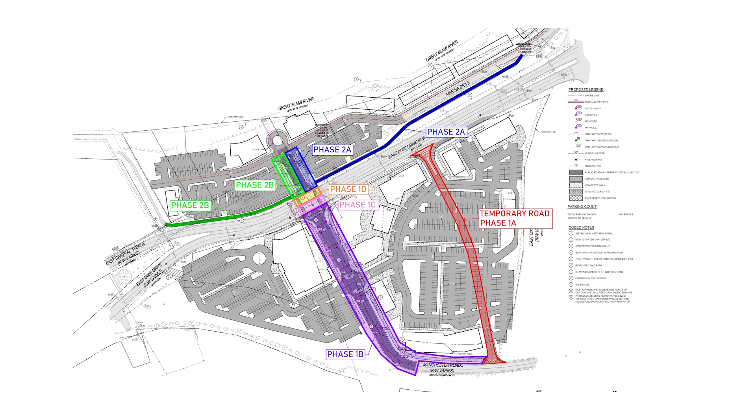So this was the concept plan that we put together that we've shown to council. Council has endorsed it, and we're in pursuit of that plan now. The first thing that has to happen is some infrastructure improvements. Those are in design now, and the bottom line is before we sell land, we need to get the roadways and infrastructure improvements put in place so that we can better control the character and quality of the development that follows. So just a couple of shots of that.

That work is underway now. From a planning standpoint, right now the subsurface engineering studies and traffic studies are being completed. Those will be completed this month, along with the overall preliminary design concept for all the public works project, which will also be completed this month. And then we go into phase 1.

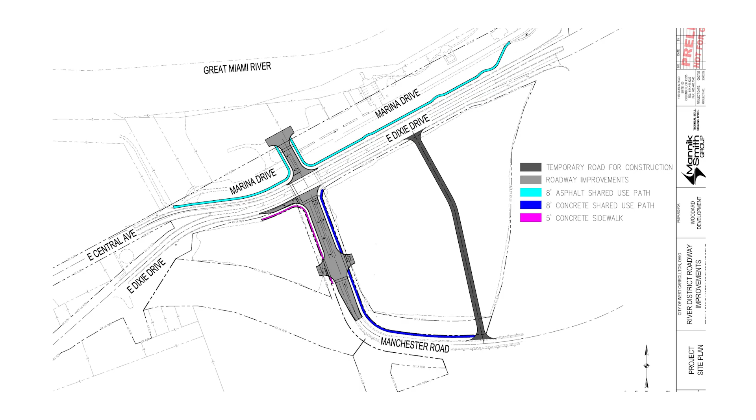So if I back up a slide, there's a temporary road to be constructed while we close the connection to, I believe that's Alex Bell that runs around the corner, to Manchester. That work will happen first, and then as we move toward the waterfront, that'll be a second phase. From a timing standpoint, that design work is going to proceed in October, should be wrapped up by March, and ready for competitive bidding in March of '24. The phase 2 timeline picks up after completion of phase 1, moving forward March through July, and should be ready for bidding in July of '24.

So the first things you're going to see happening on the site is the infrastructure improvements, which then allow us to move forward with vertical development. Now that doesn't mean nothing else is happening.

The Woodard Group has been working very hard to market the property nationwide, including going to the annual shopping center convention in Las Vegas to present the project to potential end users. There has been interest expressed. The job then becomes, once interest is expressed, we need to sort through that and make sure it's keeping with the character and quality of the types of uses we really want to see for the project. So we don't just take whoever shows up. We carefully evaluate who shows up and make a decision with the city as to whether or not this is accretive in value to the city, or whether it's just more of what you have today. So that's the process that goes on.

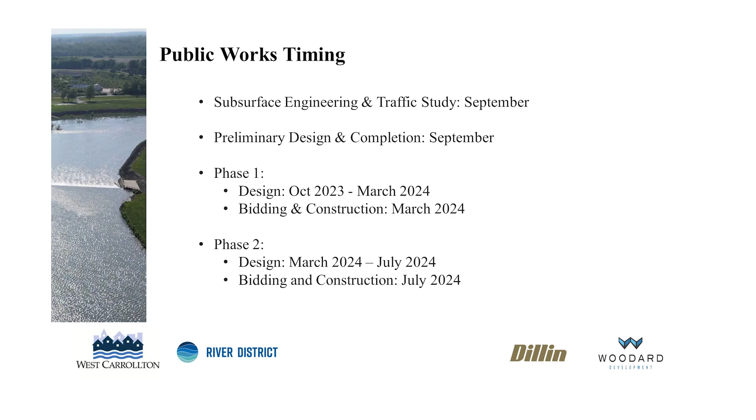I'll tell you that my crystal ball is fuzzier than it normally is because of some of the challenges that are being experienced in commercial real estate right now. Having said that, in all the master planning work that we do on all of our projects for various communities, we look for public space that can be energized with activity, because that becomes the heartbeat.

Those of you that may be familiar with the programs that our company used to organize for Austin Landing when we were managing that site, we did that with intent. The intent was to drive traffic to the site so that we could get better quality restaurants and better quality hotels.

We'd like to see the same thing happen here. So if we have to start at the interchange and all we have is the interchange, well, that's all then about local traffic. We don't have the destination orientation that we gain with the Whitewater development. So I'm putting lots of pressure on you folks down here. But that's what will work. Now you become a regional draw. Once you become a regional draw, you become a destination for the whole project. And so we can orient the project that way.

So when we come back to phasing, I'm not saying that no development can happen or should happen until the Whitewater Park is constructed. I'm not indicating that. But I am saying that things will accelerate from a development standpoint as you have success with the Whitewater Park. Is there any height limitations due to the airport across the way?

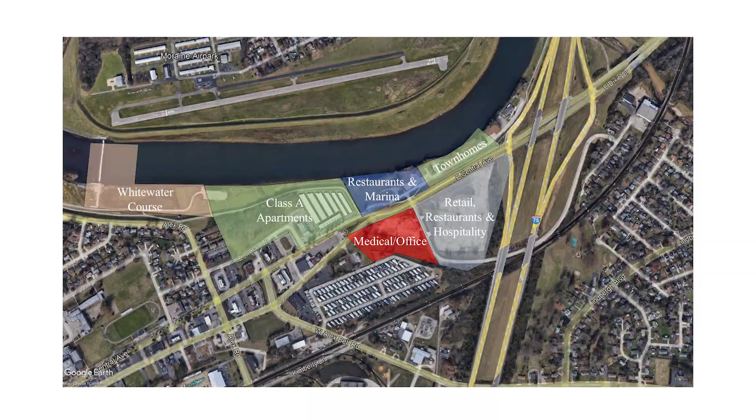I have done that on other projects, but honestly, I don't know the direct answer to that question on this site. There is, with FAA, rules both from a distance standpoint and a height standpoint, and those vary. So it's kind of a sliding scale.

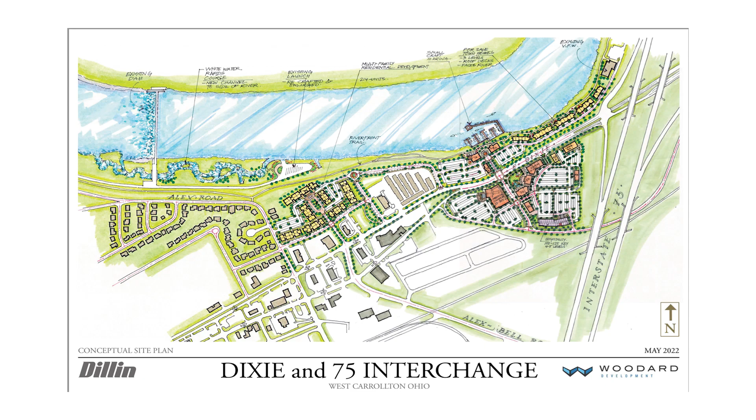What I can say is that if we're in the flight path of the FAA-controlled space, they will dictate the heights. Is there any kind of public use space in there with the Class A apartments in the Whitewater, like parks or other ways for citizens to be able to use the river?

Pavilions, the music, that kind of thing? The short answer is that the water park is a public park, so that will be open to the public. There will be no admission charge to enjoy the Whitewater Park. When we get into the presentation, we'll talk about the elements of the park. But the vision is that not only do you have to be a whitewater surfer or a kayaker, it's just going to be a place to come and recreate. I would envision that we will be doing some programming at that location, perhaps music, perhaps other types of events. But it is open to the public. It is yours as a citizen of the community.

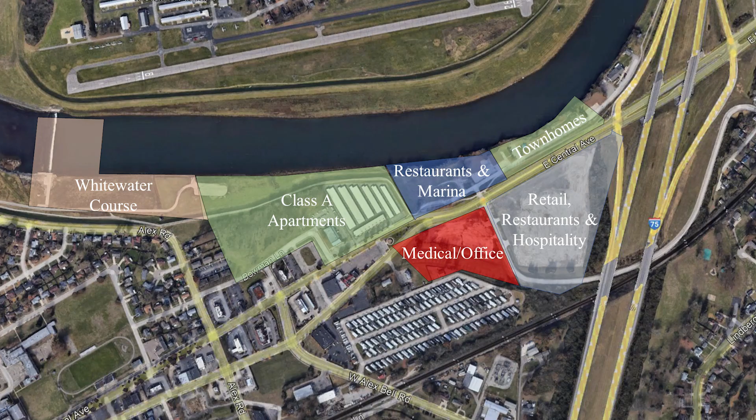Mike said that well, and I don't want to steal the thunder of what you're going to see here in a little bit. As a company and all the communities that we work with, we talk in terms of creating public space that can be energized with activity. Our goal at the end of the day is to not have whatever happens at the River District be our development. It's to be the community's development. We want you to think about it that way. Take ownership in using that public space, because it's yours. They're doing it for you.

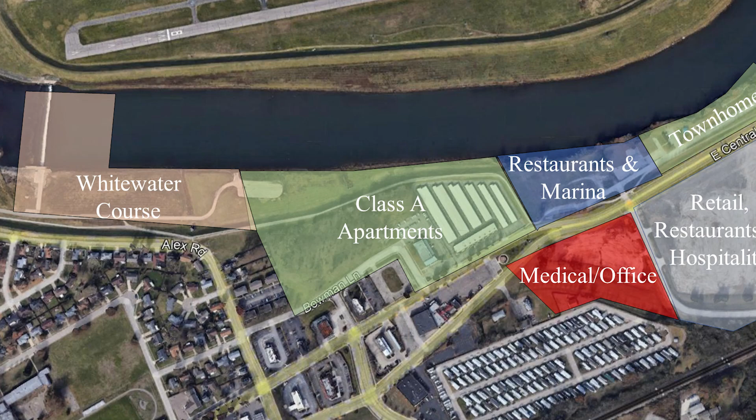In that area where you have the proposed apartments, does that not encompass the current storage units that are down on the river? It does. And that would mean that acquisition would need to be made for that property. That's correct. So what pieces of property on the river are currently owned? I don't know that I have a plan that I can show you that identifies that. But where we have the restaurants, the marina, the townhomes, the medical office, and the retail restaurants and hospitality, that is all city-owned property, and there are a couple of other parcels that the city controls as well. They did not control the storage and lock apartments, which is one of the reasons why we haven't spent too much time trying to analyze how to use that.

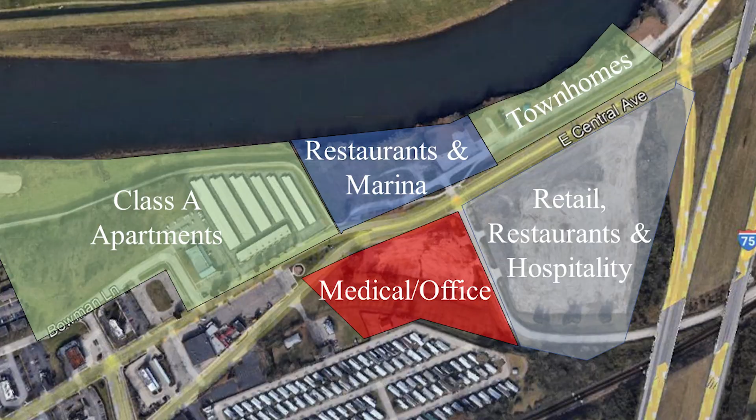That last question actually goes right into the question I was thinking. Thinking ahead, right? And I really appreciate you guys thinking ahead. That means a lot to us, especially thinking about being unique in the city, because there are so many different things off the exits that are the same exact thing. So being unique is a really important thing that I always believed in. Thank you guys for thinking ahead.

But with the thinking ahead, I don't know if it's in your vision, but do you guys have plans for future projects? I know, like you mentioned earlier, there are a few other parcels that the city has. I know that there were plans before, and I think if there are a few more parcels you guys acquire, that might be part of your plan. I didn't know if, let's say, the Shell gas station on Alex Road, if that is sold and the city buys it, or the trailer park home -- I don't know a better way of saying it -- if they ended up selling that and getting rid of it, do we have plans thinking ahead for something there? Does that make sense? Am I saying that right? Is that something that's in your future vision? If those things do get acquired, what can you do -- because I know you did it with the Class A apartments, you mentioned that already -- I didn't know if you're doing the same thing with the trailer park home and the property with the Shell gas station and whatever building that is.

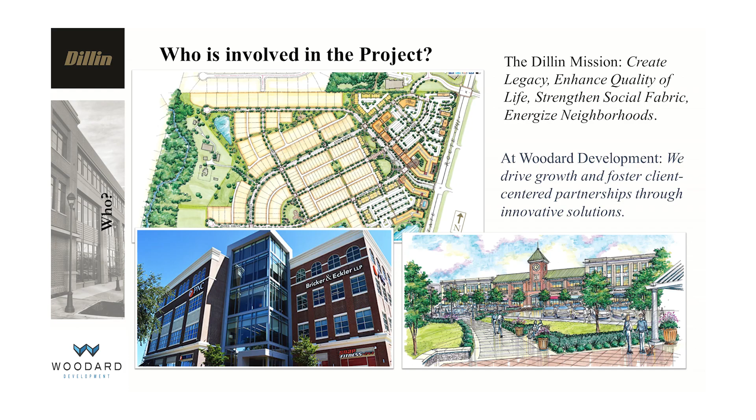And sir, your question will be addressed in the next presentation. That has been contemplated. We can talk some more about that as we go further.

As Larry pointed out, the Whitewater Park is going to be critical to the success of the overall development. And with something so important, you want the best at the table. We believe the firm we've hired, the Merrick / McLaughlin Whitewater Group, is the best in the business. There aren't many people who do the kinds of things they do, but the parks they've designed, and you'll see examples of that, are the best in the United States.

So we have the best at the table to create what, as Larry described, is going to be one of the primary assets in this community, one that we believe will not only serve people in this area, but will be a draw for people from as far as 2, 4, potentially 6 or 8 hours away wanting to use this asset and return, bringing other folks with them. So it's going to create vitality in itself, and I'm confident of that after what I've learned and the folks I've talked to over the past several days and beyond.

So with that, I'm going to bring up the team leader. Her name is Christy Weisleader. I love that name, Weisleader. That is a great name. And she's the team leader for the team that's here.

We have some very bright, capable people that Christy brought to work on the West Carrollton Whitewater Park. Christy Weisleader.

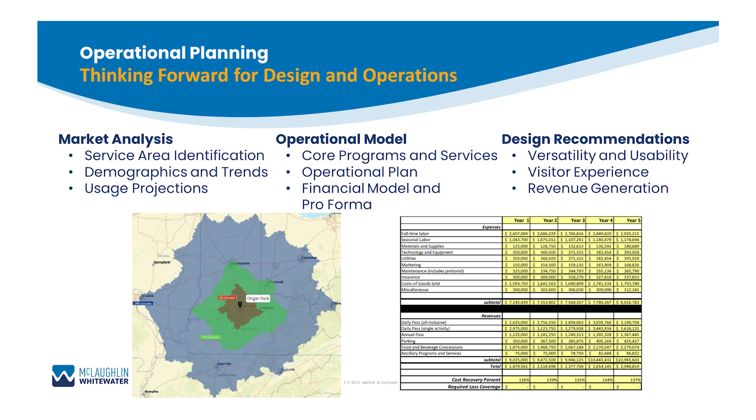So looking at what the different layers of that service market look like and the qualities and the recreational participation trends of people that live in those markets, so that we can really start to estimate with a level of accuracy what kind of usage projections and visitation patterns we would see at this facility. From there, we can put together a portfolio of core programs and services, a financial model, an operational model where you may have partners or concessionaires involved, and how that translates into a pro forma.

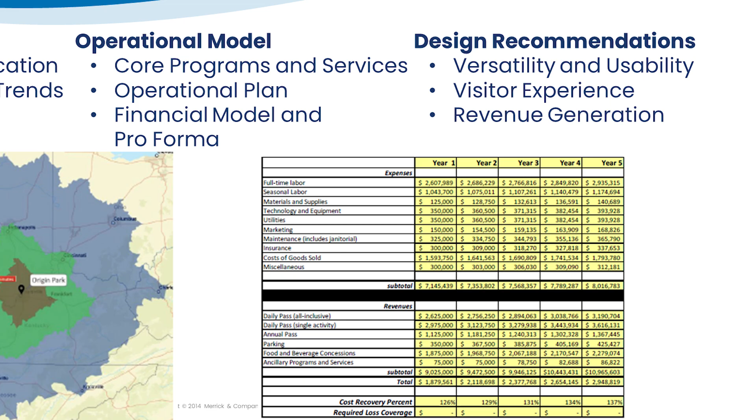And then, of course, providing support and guidance to the McLaughlin team as they're going through design. We're making sure that we're optimizing the user and the visitor experience, and that we're generating revenue so that the city can offset its operating costs in doing so.

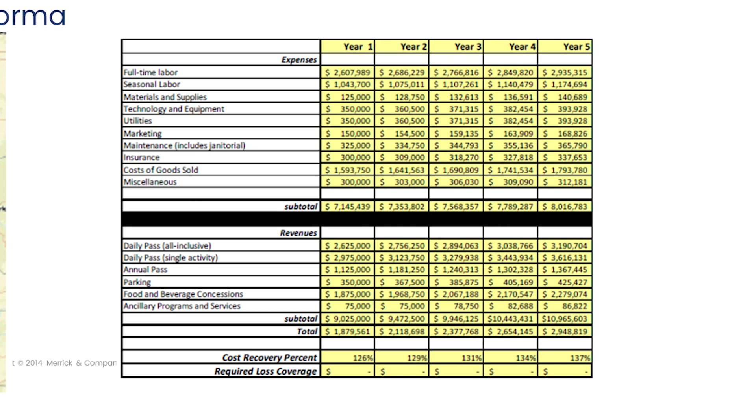So to the woman's question in the back about will this be a park for everybody else besides just whitewater paddlers, the answer to that is absolutely yes. The success of a facility like this cannot be hinged on just designing a park for whitewater kayaking enthusiasts. It's really about activating the space and energizing it for everyone.

So you'll hear a lot about some of the different design elements being considered at this point, whether it's whitewater kayakers or river surfers or families that come down and want to get in inner tubes and go down the side channel, or people that may just come down and gather, play at a playground or eat at a food truck and just hang out. That's what we really want to design a space for, so that it truly is an asset to the community, for everyone in the community.

So with that, I'm going to hand it back to Christy to kind of start walking us through the conceptual designs. I'm going to give you a little bit of project background and history really quick too, just so that you know what we've been up to for the past year.

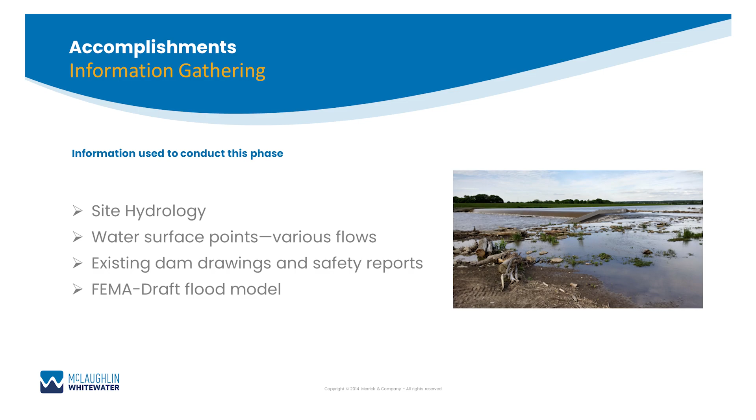So our accomplishments have been primarily data gathering. We've collected the site hydrology, looked at that, gathered water surface points at various flow elevations. We collected information from the Miami Conservancy District so that we have an understanding of the existing stuff that's there. And we also have the flood model and have been running that flood model to verify the existing conditions as well as looking at our upcoming proposed condition.

So we've collected 7 sets of water surface measurements over time through various flood events and collected critical elevations along the dam. We are currently obtaining the LiDAR data, that's the ground surface from the LiDAR fly-through over the site, as well as the bathymetry, the ground surface elevation underneath the water, so that we have that bottom-of-the-river survey information to incorporate into our modeling.

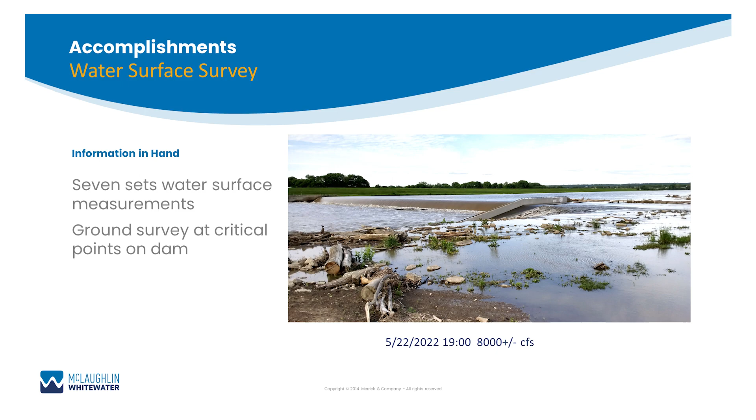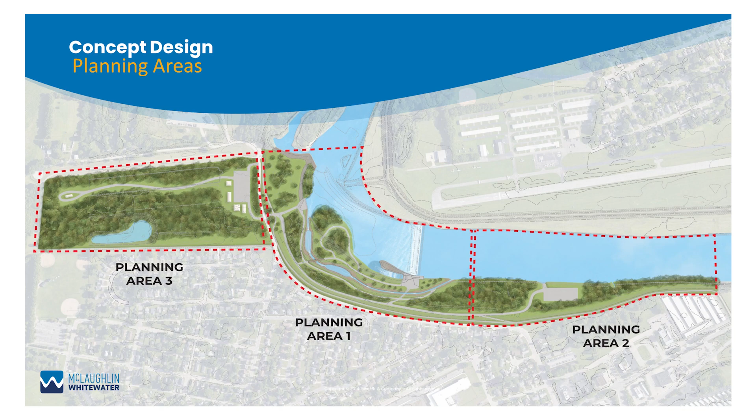Our biggest accomplishment up to starting the phase we're in now is developing a concept design. That concept design includes a few planning areas, which are just a general distinction to help us identify priority things. Planning area 1 includes our in-river improvements, the whitewater piece and the dam safing piece, plus some improvements adjacent to that to make it accessible and inviting. Planning area 2 could include boat launch areas and other site amenities, and planning area 3 is a property the city has acquired for use for this entire river park. Next, we're going to look at a video of the in-river design concept.

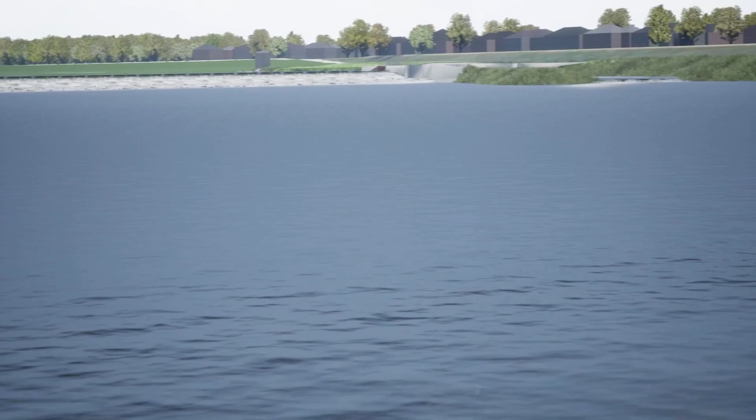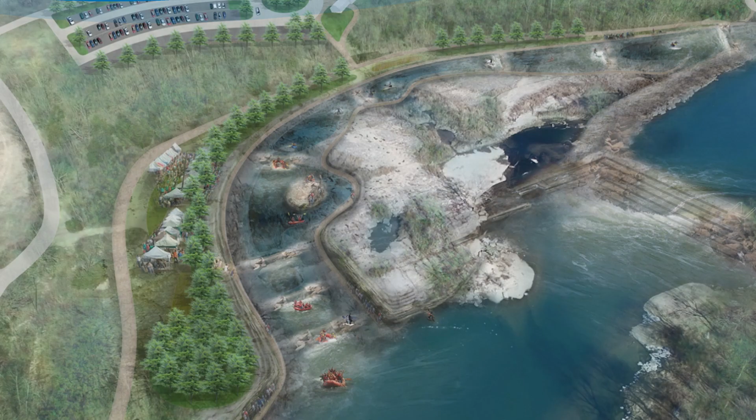Here's an example from a project that we've recently completed. This gives you an idea of what that could potentially look like. We also have the dam safing, a bypass channel, creating accesses directly to the river, some wonderful landscaping, and some fun user site amenities. This just gives you a general idea of how something could look for an overall river park.

We also have a lot of potential uses for those areas that are out of the river, and we want to make sure that in-river use is supported. You might have vendors with stand-up paddle boards, surfboards, kayaks, as well as food trucks to have some cool, interesting food after spending a day next to the river. We could incorporate something like zip lining or other fun outdoor activities that add an additional draw outside of just the river itself. And then we'd want to incorporate site facilities such as restrooms and changing rooms to make those amenities available for park users as well.

And with that, I'm going to have our project engineer, Daniel Swanson, step you through the really cool in-river features that we have planned.

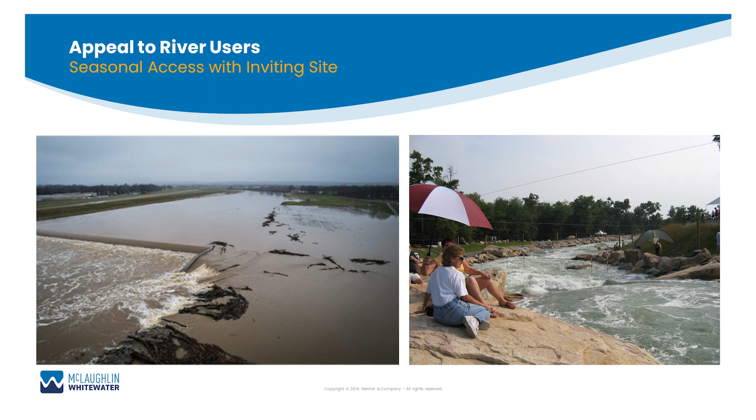So you have this really amazing site, and we know that it has a major issue: it floods all the time, and we're not going to change that. We know there's going to be a chunk of the year in spring with high flows when you're not going to be able to get to this site. But when the flows go down and you have this river that's great for recreation, we want to create a site with great site access, giving people the opportunity to get down to the river, to watch kids in tubes, watch the surfers in our wave shaper, and really have an opportunity to engage with your neighbors and engage with nature.

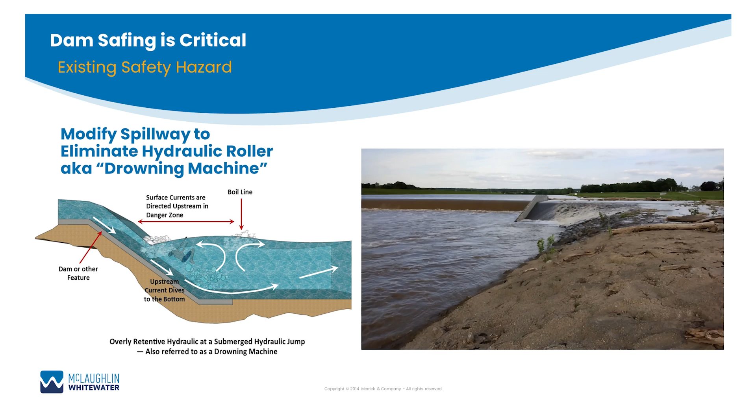Your existing dam is a major safety risk. This type of crest on a dam creates a recirculating current downstream of it. If somebody were to go over that dam, they would get stuck in that current, and there's a good chance they're not going to get out. So our number one priority on this project is to mitigate that risk.

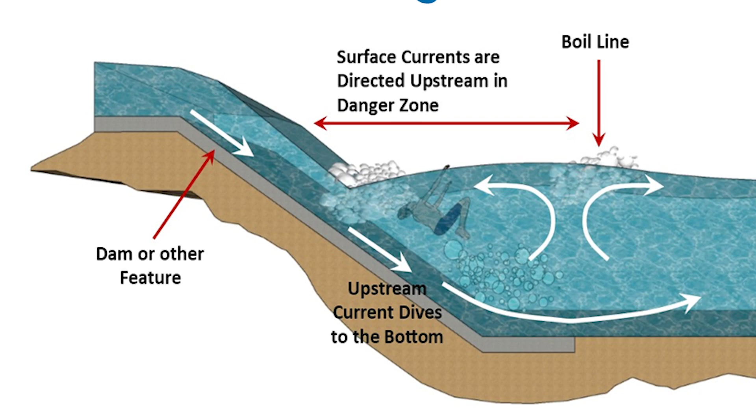After we've addressed that safety risk at the dam, we're going to be looking at creating some recreational features that will attract people to the site and give people the opportunity to interact with the river that they don't currently have.

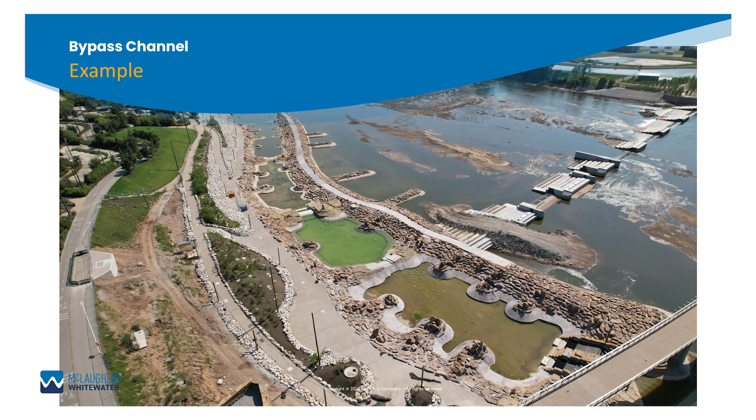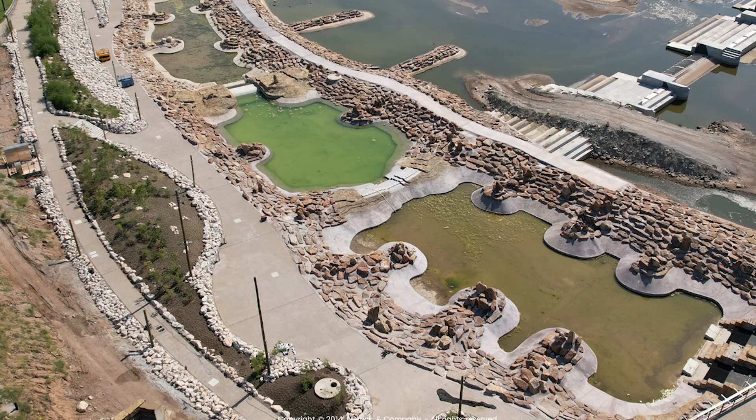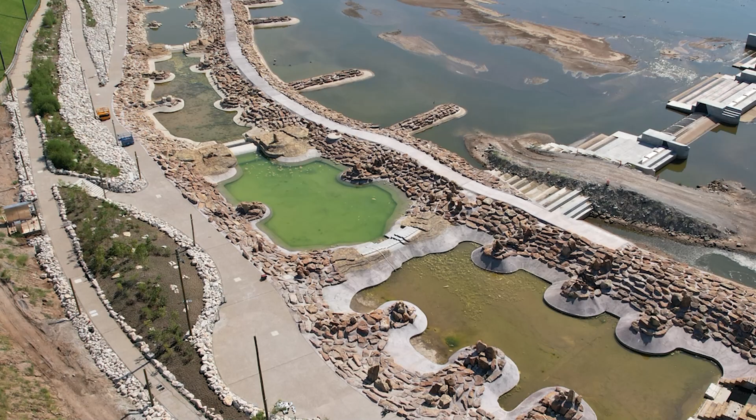This is a project that's getting wrapped up in Tulsa, and it's a similar type of concept with a side channel. You can see there's a variety of features in there. Right now, this particular project has control gates that allow the city to basically turn off water to the channel, which gives us the opportunity to see what's inside. But if they were to put those gates down and allow water into the channel, then you would get this whitewater course that people can go through in tubes and other watercraft.

So with this side channel, we're looking at something that is very friendly to beginners, people who haven't really interacted with whitewater before, and to families with younger kids.

So we're expecting to see a lot of use with kids in inner tubes, kayaks, and also having the opportunity to have an education space where you could have an instructor with a group of people with kayaks where they can learn in a low hazard environment how to roll their kayak, how to get out of their kayak, and how to do different maneuvers that are going to be easier to learn in a situation like this, as opposed to an actual class 4 rapids in the wild.

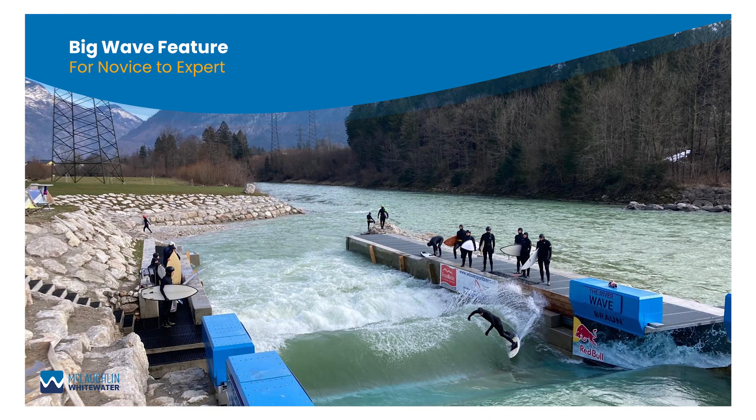Here we have an example of one of our projects that's in Austria. This is sort of similar to what we're envisioning here, with a channel that includes flow. You can see a pretty expert surfer on this wave.

So, timeline of events. When is this all going to happen? Right now, we're in preliminary design, and we've been meeting with stakeholders over the last couple of days. We're going to take feedback that we got from stakeholders, feedback that we get from all of you tonight, and incorporate that into our 30% design set. That set shows where the major features are. We figure out our major design decisions, and we use that set to submit to different permitting agencies.

When you construct a leveed reach like this in the river, there's a lot of agencies that need to approve the project before we begin construction. We need to make sure that we're not increasing flood risk. We need to make sure that we're not going to negatively impact the levees, and quite a few other things that we'll be looking at.

So we'll be doing that permitting process throughout much of 2024. We'll take feedback from those agencies and incorporate those into our final design. And we would be looking at advertising this project in 2025 and starting construction.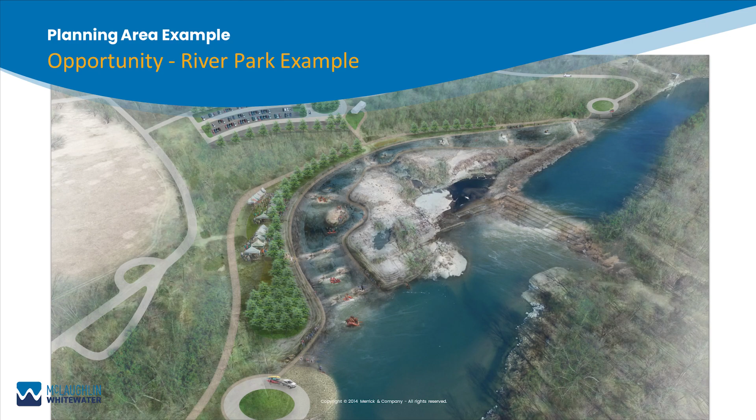So is this going to be open at all times, or is this going to be something where if there's somebody controlling the lever, adjusts the wave, is that going to be on a schedule? As far as the park being open at all times, that is something that the city is working through.

We've met with various stakeholders, and there's a high level of interest specifically from the surfing community or the kayaking community in being able to use that. But there's also a lot of safety concerns, specific to safety enforcement, so that's something that will have to be worked out.

For the second part of the question, there would probably end up being a schedule of some sort - like today it's a green wave for boarders, tomorrow we put a foam pile on top for kayakers. That has everything to do with what the community is interested in and wants. The schedule could vary, defining the big surf wave feature for a single day focused on kayakers, or focused on entry-level beginner surfers, or it could change multiple times a day in a few hour blocks, modified to adjust. It depends on what the overall community wants and needs and how it best supports them.

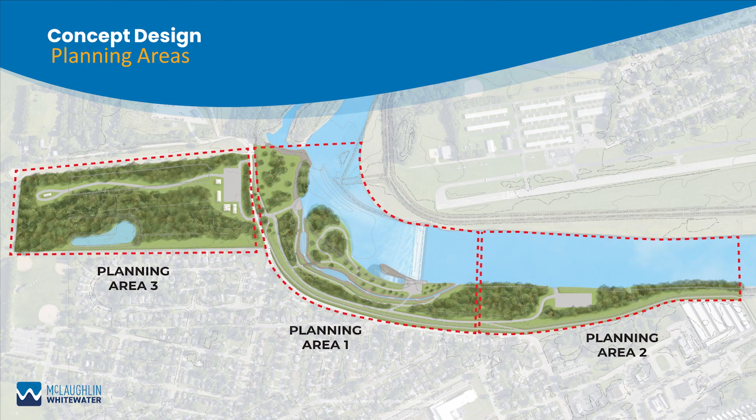I was curious, the airport is pretty close to the river, so I was wondering what kind of barriers you are anticipating to provide a safety environment, considering how close it is, and what limitations you're anticipating and how you're thinking of mitigating those concerns. Specifically with the airport, our understanding is there's a 100-foot height limitation tied to any structures, to make sure the airport can continue to run without concerns.

Within the river itself, within the lower levee area, we will not be able to have permanent buildings and structures per MCD, but we will be able to have other amenities incorporated, potential movable amenities, as well as potentially shade structures and trees. Addressing the second half of your question, our restrictions dealing with flood and higher water flows would potentially create some limitations on what can be included within the river and the levee area itself.

My husband is handicapped, and currently he fishes off of the dam. So with this wave thing, how is that going to affect, once this is all put together, his ability to get down there, because he can't walk?

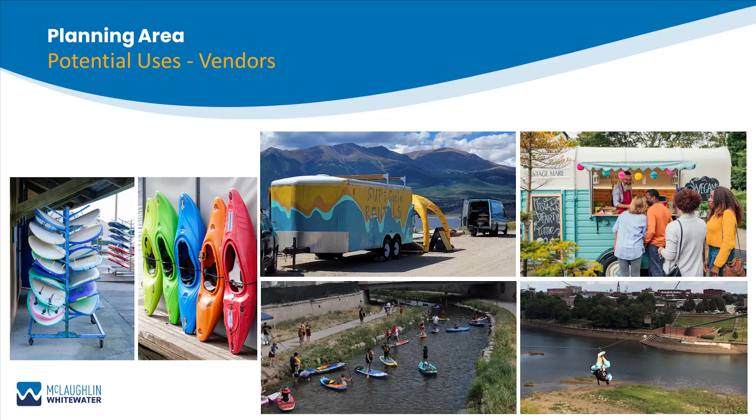ADA access for all the trails is something we've already recognized needs to be incorporated, so access is a priority within the site. We are looking at where the best locations are to support anglers within the area, because we want to make sure that's accessible and blend the current fishing community with the recreational community. It's great to know we can put that as a high priority item, to make sure we're incorporating access directly to those fishing areas.

I noticed there's nothing about splash pads for children. Is that something that might be talked about or thought about, especially for younger kids?

I think that would be great, probably not at this location though. I'm not sure that given the constraints with Miami Conservancy District, we would be able to install those kind of permanent features. As Christy mentioned, anything we install down in the riverway - it's not to say we can't do temporary structures, but whatever we do has to be removable, because of many issues including the flooding in the area.

I didn't notice in the timeline, when does the rebuilding of the dam start? Approximately, I know there's no hard answers. Let's go back to that schedule - we're looking at likely the low flow period, so probably not until June or July of 2025, because we'll have restrictions within the river on when construction can happen due to floodwater levels.

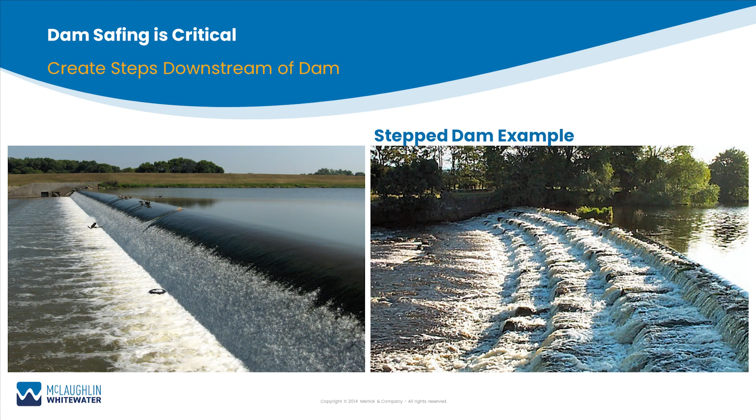Hello, you've seen the features up in Dayton. I was wondering about this big wave thing. Is it solely blocked off so you cannot come down the river? If we're on a paddling expedition down the river, will we be able to fall into this wave and catch it? Or do we have to get out and maneuver around walls to get into it each and every time?

Currently, the concept has the bypass channel available for anybody coming down river. They could stop and then use the feature right there. So we'll look at the access potential specifically for a kayak community that's interested in that.

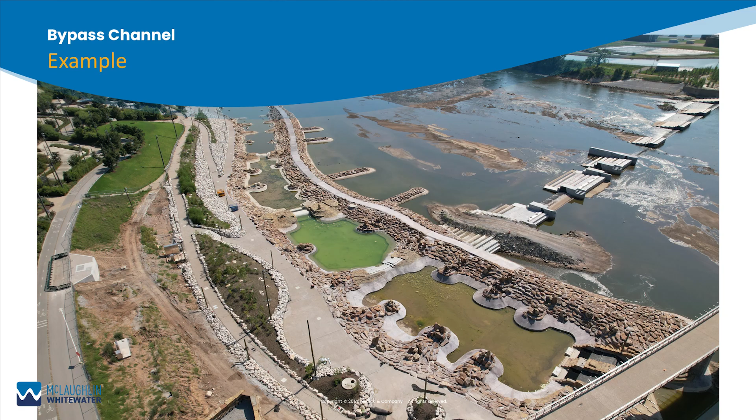John Anderson has some additional input on this one. I was involved in the initial planning of this about a year ago, and I think we did a presentation last May. The concept, we think, has the city, and the stakeholder community has been very decisive about what they want. What Christy mentioned is that if you wanted to use the big wave feature or the kayak wave feature in a canoe or kayak, the way to get there most easily would be to paddle down the bypass channel, then paddle back upriver, attain up to the bottom of that pool where the big wave is.

There would be another wave down there, which we really haven't mentioned, that would be specifically for kayaks and canoes. Essentially, whenever the wave is running, there will be water running over it, and it would be more of a retentive wave for playing. If you wanted to get up into the larger wave, one would have to basically get out of the boat, carry up into the pool, and then get into the wave from there.

And we did get a lot of comments about the walls. Unfortunately, the Austrian example that we showed, in the opening picture and most of the videos, was actually specifically and exclusively for river surfing. The example in Boise does have eddy access from below around the walls. You can actually scooch around them and get on the wave from there.

And it really just comes down to, oh, by the way, in Boise they have an employee in the Parks Department that is called the Wave Master.

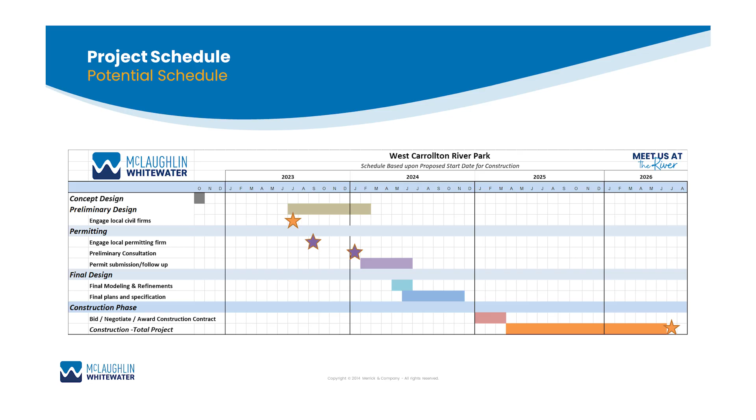The second part was you guys mentioned a training area. Is that factored into this project, or is that going to be left up to the city and county or community to organize later down the road? Having the space in the area available for training classes is something that we would want to incorporate into the overall design. Over the past couple of days, I've kind of learned that that's a very big priority in having something like that available, because there's not really anything else locally to support that. One of your slides had a slalom course, and that's not available anywhere in Ohio, which would be a great addition.

Yeah, for maneuverability, plus just spectators coming in and saying, what is that? What's going on? We want to know. We can't do the wave thing, but we can paddle around some holes and maybe get more interested.

Thank you for that comment, I appreciate the additional input. I hope everyone's excited about this. I think it's a genuine opportunity for the city to really distinguish itself in the Miami Valley and in the broader region.

So the main entrance to most of this is going to be on the far side of the river, down by the sewer area, is that correct? Alex Road, the way it's currently envisioned, that would be the primary entrance to the facility, yes.

Is there any plan on reconstruction of Alex Road then? Not specifically, I'm not sure. That's probably something that would be included in the maintenance schedule for the area. I'm not sure what that looks like. I can certainly talk to the city engineer. We're certainly going to want the entryway to this to be nice, so we would look at that as part of the overall project, but I don't have a specific answer for you right now in terms of Alex Road.

Because it's a smaller road with the traffic, widening the road or whatever, I'm not sure how that would look since it bumps up right against the levee, but certainly something we can take a look at and see what's possible. We want to get a gauge on what the traffic is going to look like to this location, and how much it's actually going to affect the traffic patterns.

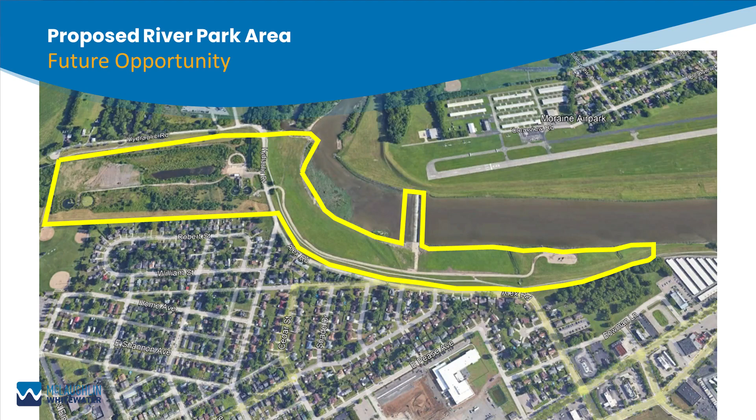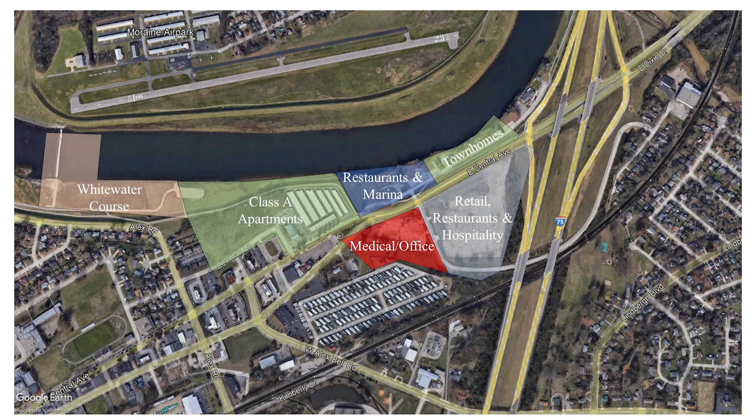My other concern is where are all these people supposed to park? That's a good question. There is currently parking, a parking field down in the river area. There's potential to expand upon that, and that would be very likely. It was also pictured that there's an area across the street, across Hydraulic, the former wastewater treatment facility on the west side of Hydraulic, which we envision as part of the operational area. So parking could be incorporated there as well, and I think there are plenty of opportunities for additional parking.

We're thinking we want to facilitate food trucks down in that area, which would probably make sense on some type of asphalt pad. To answer your question, still being designed so I don't want to get too far out over my skis, but I see potential for perhaps a performance venue, something portable, where people could go and listen to music. I think there's potential for all types of activities.

I could see being a grandfather, taking my grandkids there and just spending time outside with them. There's going to be the opportunity for kids to tube down the portage path, so I think there's going to be a lot of opportunities to socialize down at the river park.

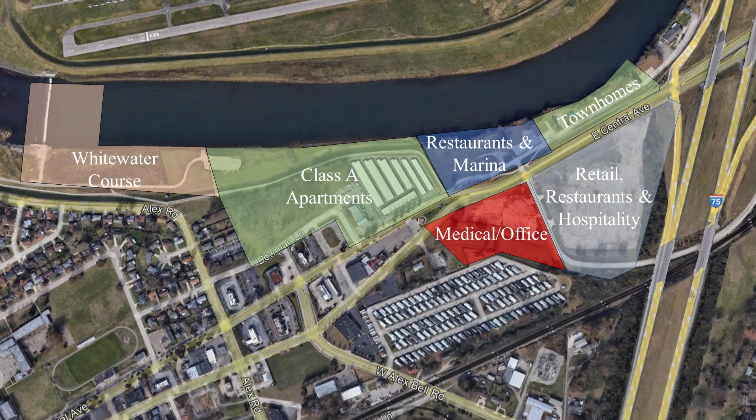Mike, I know earlier the Whitewater folks, at least in our meetings, were talking about creating spectator areas that were very important. They were working pretty hard on how to expand that so people could just come watch, since there are a lot of people who don't actually want to jump in the wave but sure want to watch. They're very keen on creating those areas, at least that's what I heard in the meeting.

Something was mentioned earlier about not having permanent structures so close to the water. Does that mean like some other places have, where they have breweries or restaurants close by? So that's why there was mention of putting in more portable type of offerings.

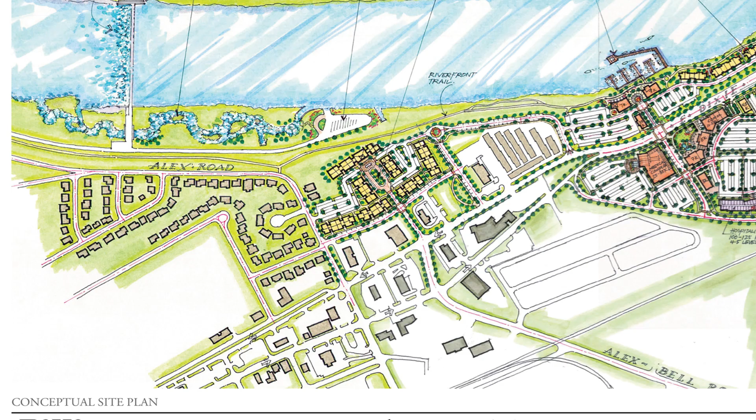Basically, we can't do anything that's going to interrupt the current calculated flow for flood control in the area. You can't create permanent vertical structures that impede flow or change the flow calculations of the river. These smart people calculate all that as they're making changes, and they live within the regulations provided by the Conservancy District. We can do things on a temporary basis that could be set up and brought down, so I'd see us creating foundational areas on the floor of the river area, but anything permanent that comes up vertically and affects flow is not allowed.

Will this park be maintained by the city, or is it going to be outsourced, or is it going to be a metro park? Where's that going to come into play?

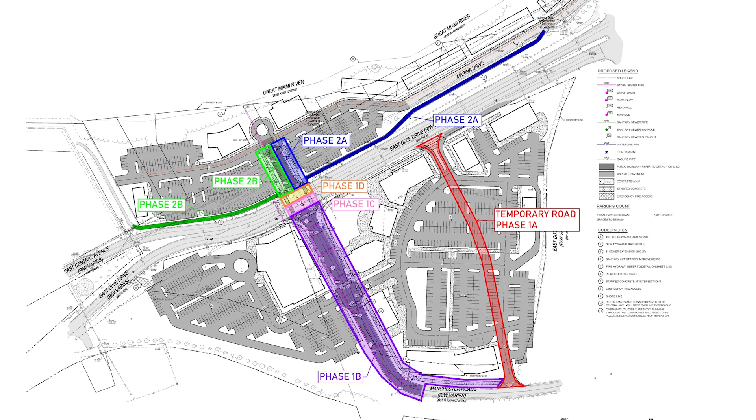That's a great question. I would envision this would become something managed under the city's Parks and Recreation Department. A logical follow-up question is, how are you going to pay for that? We have a couple of different funding sources in place. This overall area, which will be driven by private sector development, is a tax increment finance district. Proceeds from that district come from property taxes that come into the community—a portion of them go to the TIF, and a portion continues to go to the school district.

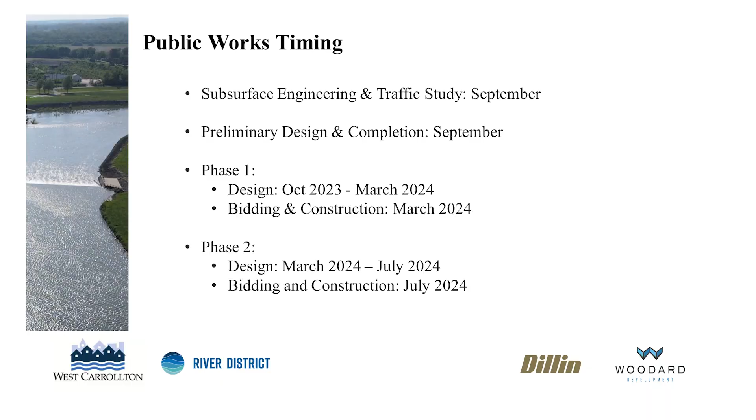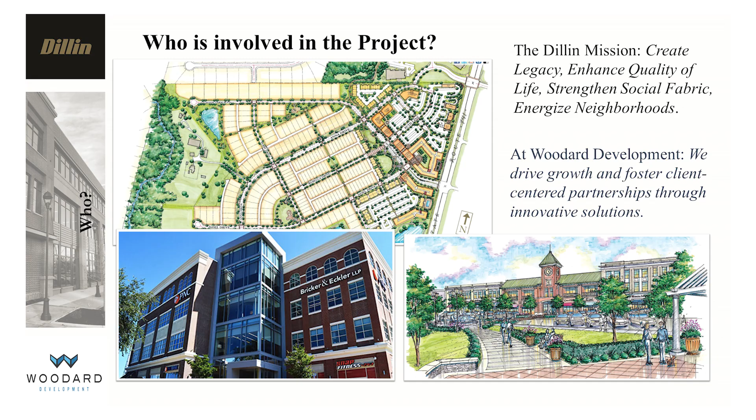We can take the funds derived from the TIF district and use them to pay for public improvements and activities within the public improvement area. That would be one source of dollars, and there will be additional costs from this. Brian's going to offer a lot of insight, because not only will he be developing a pro forma for what the operational cost of this will look like as it's conceived in our mind, but he'll also identify potential revenue sources. There are other models where public facilities derive income from leases to liveries, canoe liveries, or licensing for food trucks. So there's potential for income into the park from people who want to provide services or sell their wares there—that's another source of funds.

We're also looking at something called a new community authority. There will be a sales tax that applies within the mixed-use development area, and we'll be able to take a portion of that to fund activities that support the overall river district.

I'll just add to that—the intent of a lot of the work we're doing is that operational plan, so we can look at how we generate earned revenue through canoe rentals, equipment rentals, program fees, or concessionaire fees for food vendors, to offset operating and maintenance costs.

Just as a point of reference, the city of Ann Arbor, Michigan has a very popular similar facility on the Huron River. It's run by the Parks and Recreation Department, and they make $1 million a year just from kayak and inner tube rentals, which goes to pay for the ongoing operations and maintenance of that system.

One of the things we've come to realize is what a great stretch of river we have between West Carrollton and the city of Miamisburg. It's absolutely scenic—you wouldn't believe you're in Dayton, Ohio. I think people are really going to realize that as a result of having the kind of access we're going to provide to the river here, and it'll become a popular canoeing trip. Thank you very much.